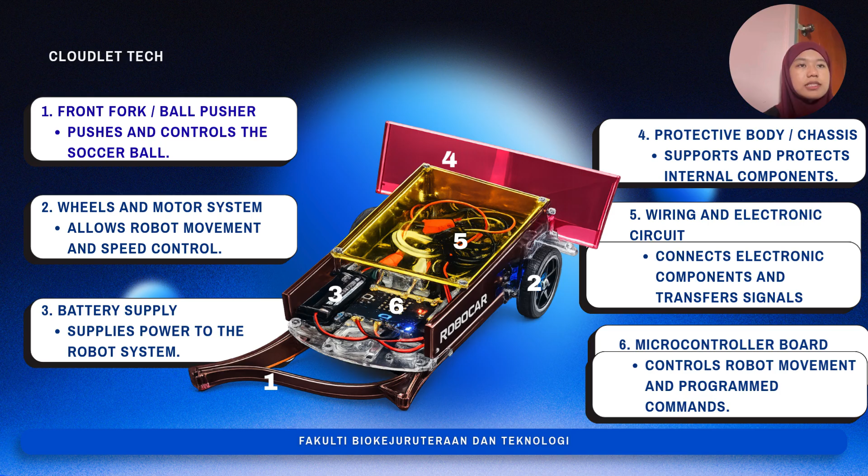The protective body or chassis supports and protects the internal components from damage. Meanwhile, the wiring and electronic circuit connect all electronic parts and transfer signals through the system. Finally, the microcontroller board acts as the brain of the robocar. It executes program commands and controls the robot movement automatically. So together, these components allow the robocar to operate efficiently and perform its intended robotic task.

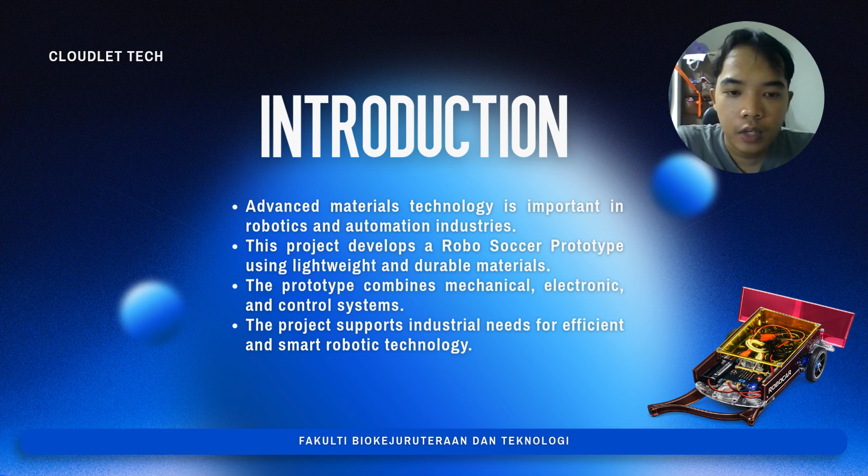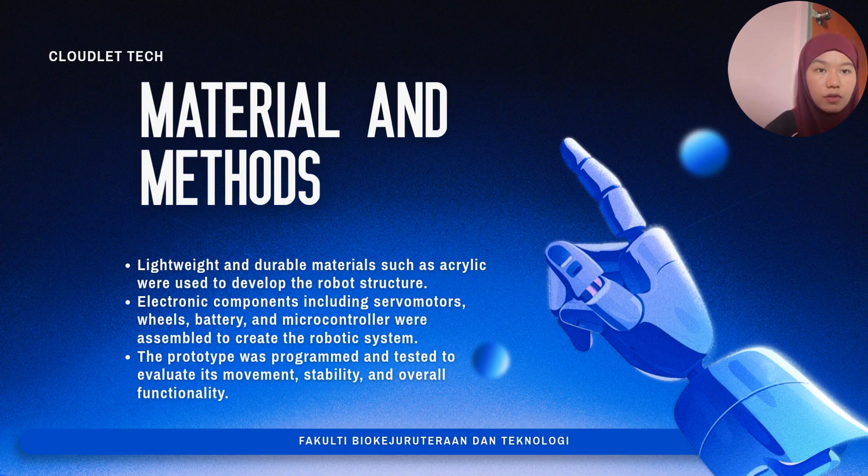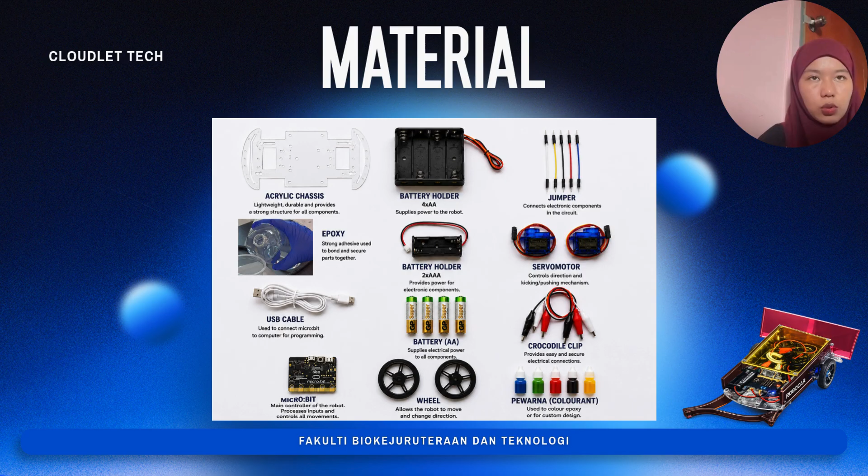So this slide shows the materials and components used in the robotic car project. The acrylic chassis is used as the main body because it is lightweight and durable. Epoxy is applied to strengthen and secure the robot structure. Batteries and battery holder provide electrical power to the system, while the jumper wires and crocodile clips are used for electrical connection. The micro:bit functions as the main controller to program and control the robot movement. Servo motor and wheels help the robot move and perform its function.

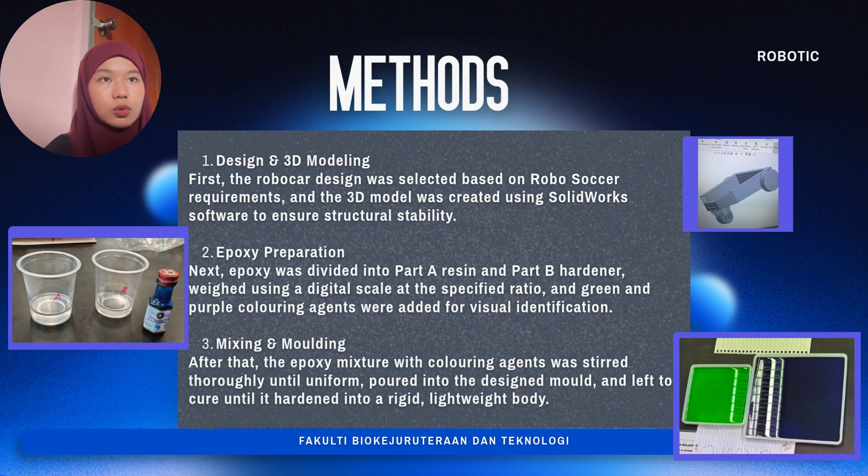This slide explains the early method used in the robotic car project. First, the robocar design was created using SolidWorks software to ensure a stable structure. Next, epoxy resin and hardener were prepared and mixed with a coloring agent. After that, the epoxy mixture was poured into a mold and left to harden to produce a lightweight and strong robot body.

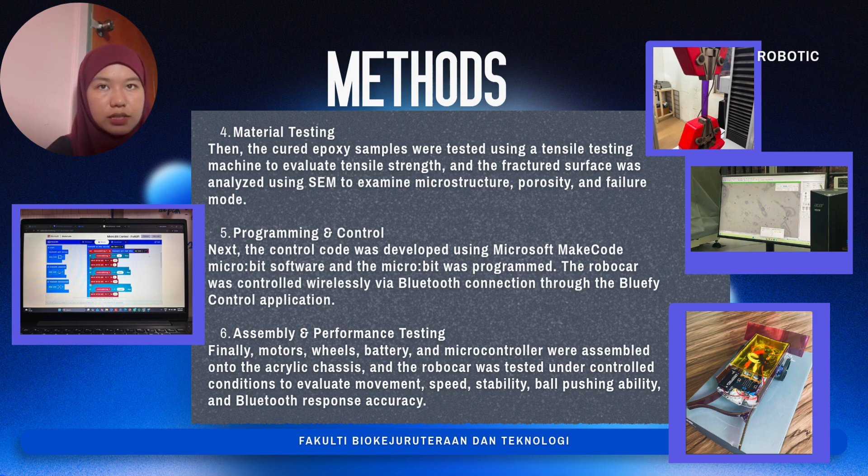So today I will share our results and discussion regarding the tensile properties and structural integrity of our sample. In this presentation, we will look at how this material behaves under mechanical force and connect those results to its physical structure. Our goal is to explain what the numbers are and what they tell us about the material's overall quality and strength.

To test the structural integrity of the sample, we used a UTM, Universal Testing Machine. We tested 3 different samples under the exact same conditions to keep our data accurate. Each sample had a starting length of 100 millimeters. We pulled them at a steady speed of 20 millimeters per minute using a tiny starting force or pretension of 5 newtons just to keep the sample straight before the real test began. So this setup ensures our testing is fair and reliable.

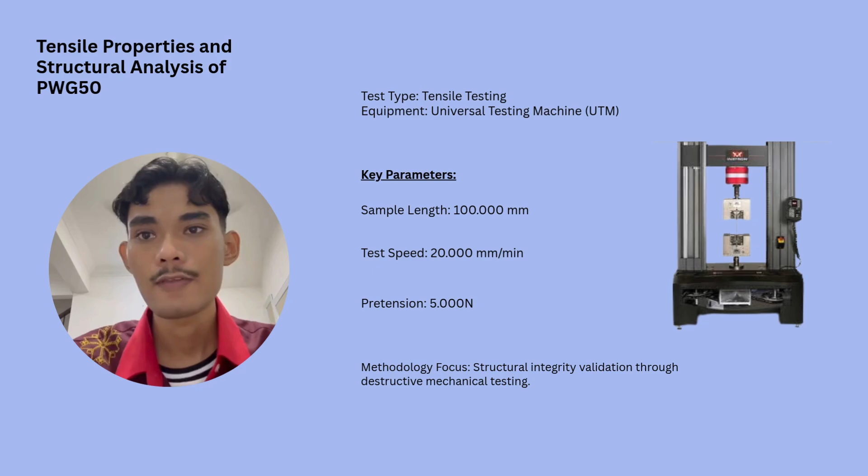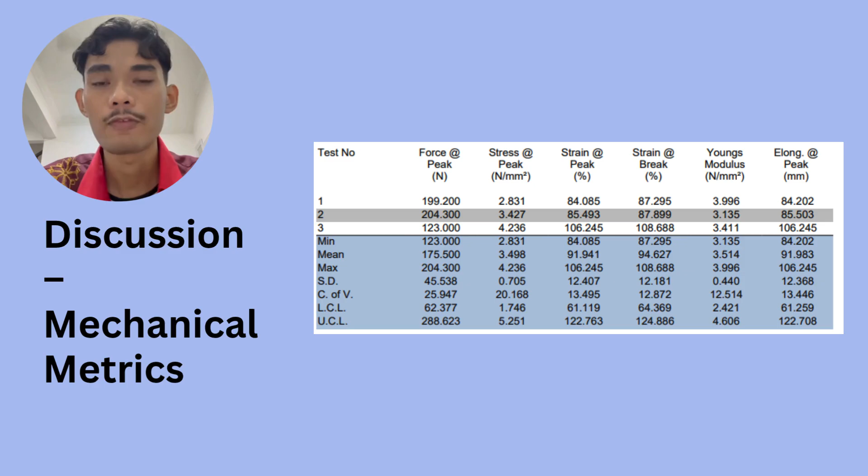However, we also notice a high statistical variation in the peak force, which sits at about 26%. This high variation confirms that the material is not completely uniform throughout the entire batch. Let's connect these mechanical numbers to the material's surface microstructure and structural integrity. Because the material stretches so much, averaging nearly 95% elongation, we can conclude that its internal structure consists of highly flexible rubber-like chains that easily slide and unfold when pulled.

But why did Test 3 break at a lower force while stretching further? When we look at structural integrity, the surface of a material is highly critical. Test 3 likely had microscopic imperfections, tiny air pockets, or small surface variations on its skin. These tiny defects act as weak spots. They caused the sample to yield early at just 123 newtons, but because the rest of the material was still healthy, it kept stretching out like a rubber band.

In conclusion, while the sample has excellent flexibility, we need to improve our manufacturing process to eliminate the surface defects and ensure uniform strength across all samples.

Thank you. To conclude our presentation, we have successfully developed a smart and efficient RoboSoccer prototype. By combining modern materials technology with mechanical, electronic, and control systems, our team created a fully functional robot designed for industrial and automation needs. A major success of this project was our material selection. Using a lightweight acrylic chassis paired with custom-made molded epoxy resin gave our robot a highly durable protective body. This ensured excellent structural integrity while keeping the vehicle fast and lightweight.